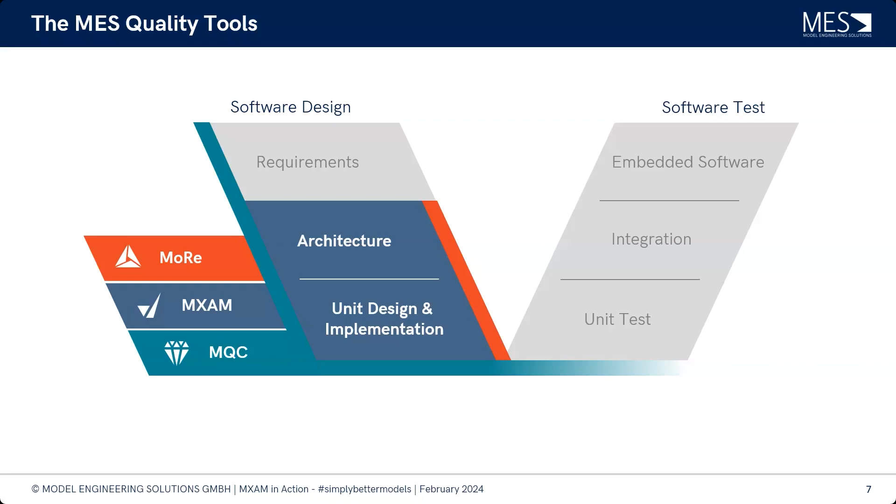But since this is now the webinar on MXAM in action, we will get to see MXAM a little bit more, really focusing on the Simply Better Models part. So this webinar can be split up into 4 different parts, where I would like to take a step back again and motivate the static testing. Then we will see how MXAM is really the guide to better modeling. And then we will see what to do to achieve simply better models. And this is concluded with a live demo.

So let's take the aforementioned step back and see static testing and the MES Model Examiner, where we come back to the V model. We have the different sides of the V model, and we already saw that the MES tools are focusing on the left-hand side of the V model, consisting of the design phases, and on the right-hand side we have the test phases. And the test phases care about the functional quality of the software, the fitness of the functionality. And this tackles the question: have I developed the right thing?

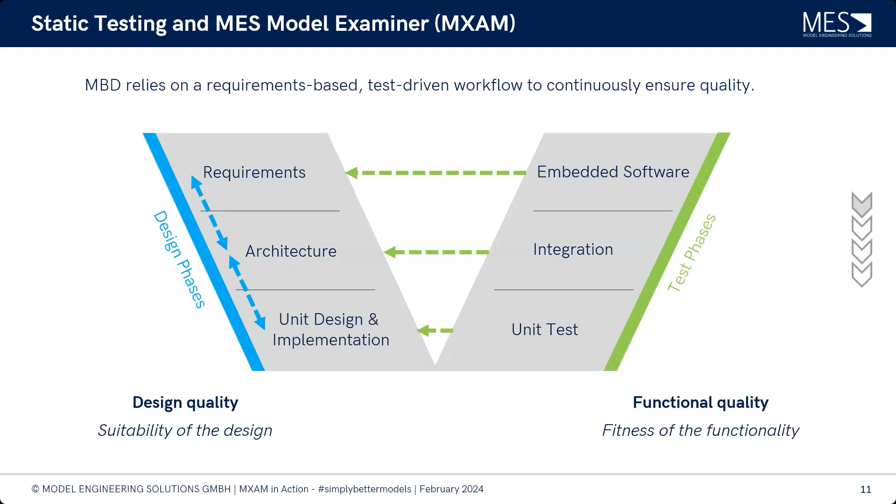And in order to ensure the quality of the design, we can front load the quality assurance here with static testing of models. And with that, we can improve the quality of the model and the developed software even before code is generated.

So that we can really start with quality assurance at the first stages of development. Therefore, the MES Model Examiner, or short MXAM, does the static testing highly automatically, in order to increase readability, robustness, and avoid errors, because it can cost you much when you detect errors late in the development process.

As I mentioned, we can assure the design quality even before we generate code. This means, with good design quality of a model, you also improve the generated code. So let's see how this is done in detail, with a small picture example.

So this is a very small subsystem here, but when we assign to review it, we may stumble upon different things that are not good design quality. For instance, when we tackle the question, okay, how is the interface? So let's have a look at this.

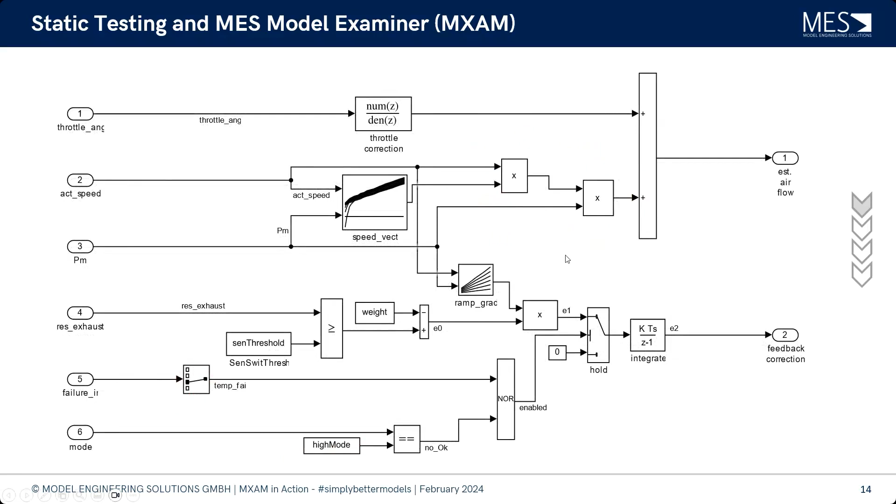And how does the MES Model Examiner do this content-wise? So the users of MXAM know this. In order to evaluate design quality in the last decades, it was established that we have modeling guidelines coming from different standards, like MISRA and the MathWorks Advisory Board. We at MES, as experts in functional safety, have also published our own modeling guidelines document.

This tackles several topics, like we saw -- model layout, data and control flow, data typing, which influences the generated code, and also configurations in and around the model, as well as configurations for the automatic code generation.

On the other hand, MXAM also assesses the application of design principles via different model metrics, which are derived from standards. For example, the functional safety standard ISO 26262 has several design principles for software architectural design recommendations. In order to assess if we follow these recommended design principles, we can use metrics, which map certain numbers to specific model parts, in order to see how well we executed these design principles.

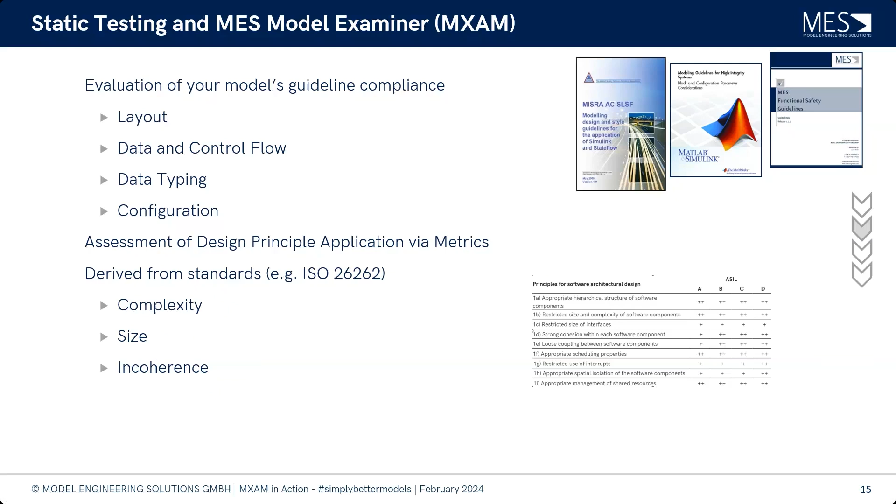So now that we know what is analyzed, let's have a look at a typical agile working day when developing the model. We want to ensure the suitability of the design quality, so we'd like to analyze our model in respect of design quality and have a report that shows us what the quality is. We'd also wish for guidance and hints on what to do now to improve our model and the design quality, in order to achieve better models.

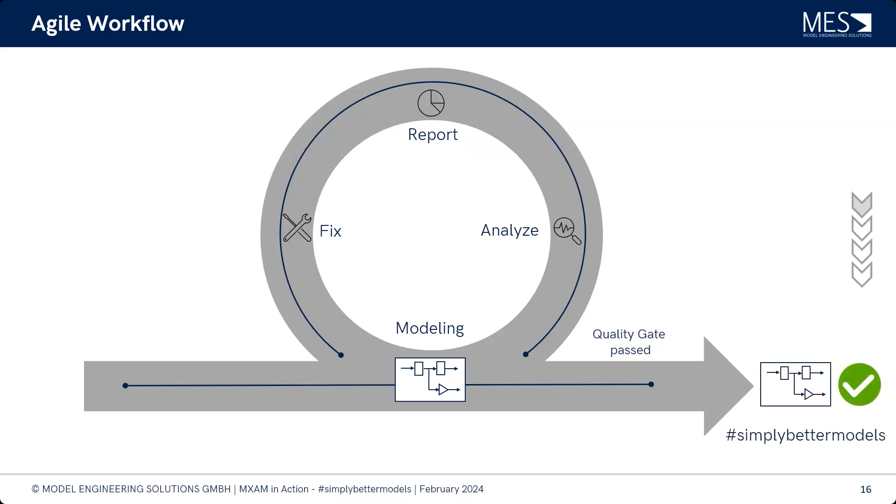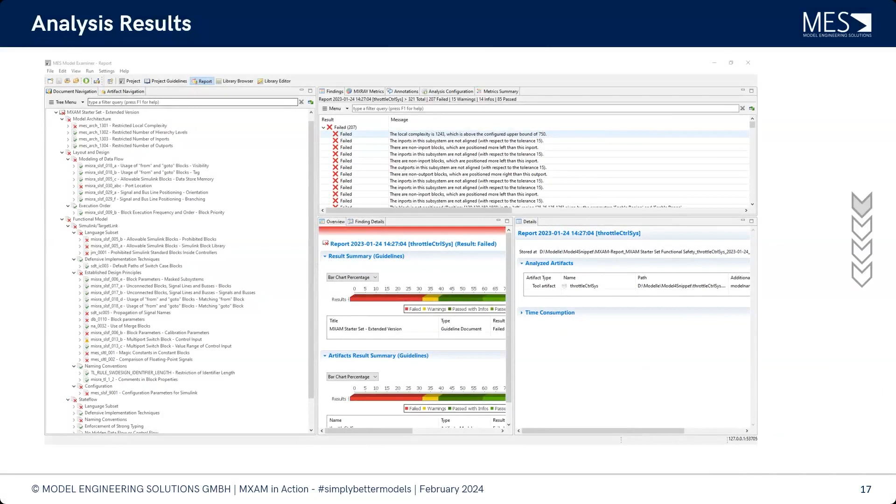So once we have such a report and know what is really analyzed automatically, the question now is: where to take action?

And this is now the point where MXAM becomes really your guide to better modeling. So we want to have a look at the different sections of an analysis report of MXAM.

At first we have, and we will see this again later in the live demo, the document navigation, where we can start from the point of view of the guideline document to see our design quality there and where we want to improve.

But you can as well take this from what we call the artifact navigation, really from the point of view of the model hierarchy, where we have enabled the number of findings so that we can directly see a certain subsystem that may need the most attention.

So for instance, we see here the subsystem 'airflow calculation' at first glance seems to have the most findings.

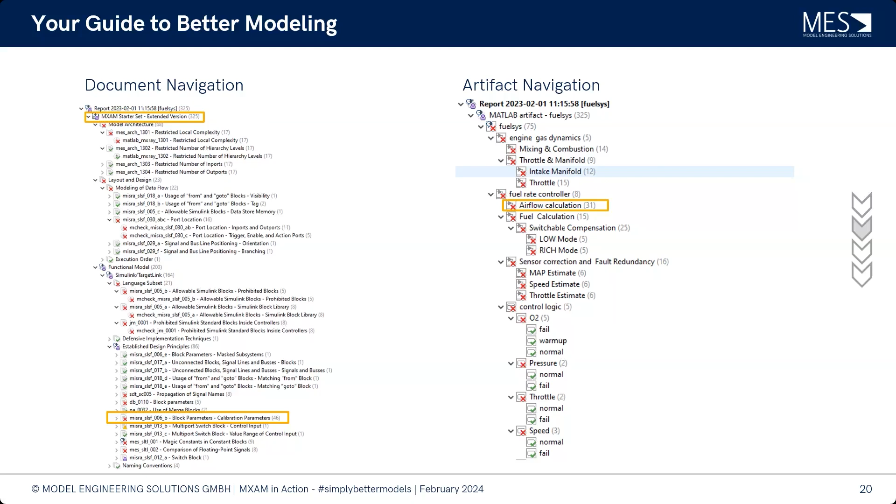So in the document navigation, we have the document and can tackle the different findings per guideline and guideline chapter. On the other hand, when we want to tackle it from the point of view of the model hierarchy, we can use the artifact navigation.

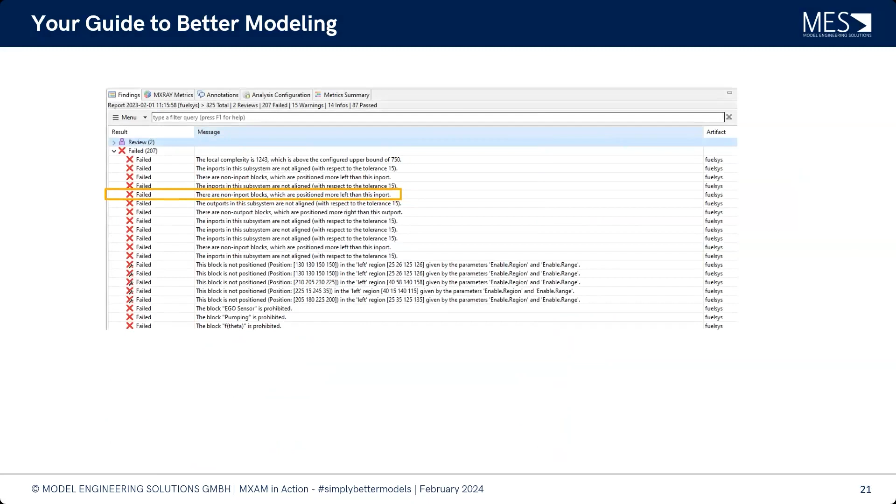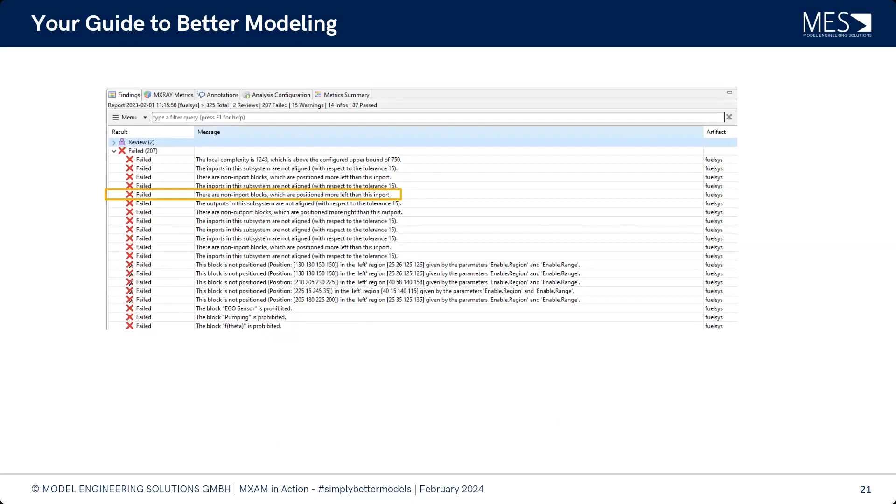Then, per this navigation, we can have all the findings listed. For instance, when we want to see which findings are in the airflow calculation, we get this in a table list. From the table list, we can drill down further to the details of these findings, where it explicitly states what the guideline violation is, with direct links into the model.

So with MXAM, you always have a direct connection to MATLAB Simulink, and from there you can directly look at the affected part in the model.

This is not only a guide to where to take action, but also good guidance on what to do now. Directly from the report, you can look at the documentation of the guideline and the check, and see that for each check there is a proposed solution as well as a repair action which can be carried out.

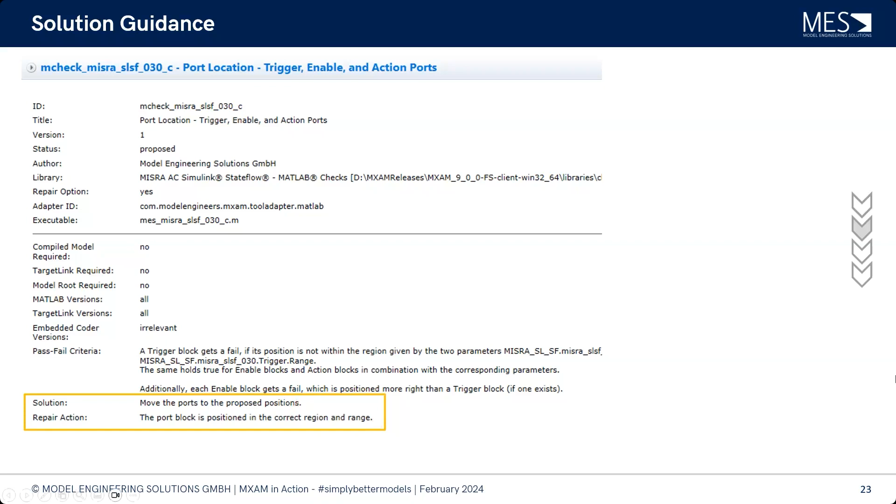So this leads us, after we have answered the question of where to take action to increase the design quality of my model, to the next question: how to take the action, in order to achieve simply better models.

So here we get back to these examples. We have two solutions which are pretty straightforward. One concerns having consistent signal naming throughout the model, to increase readability and to have a good mapping from model to generated code.

It's clear that we want consistent naming, and one thing that supports this is to set the Simulink property 'show propagated signals' to on. Also, when it comes to switch blocks or other blocks, there's an option to require all inputs to have the same data type, again in order to avoid unexpected behavior, for instance.

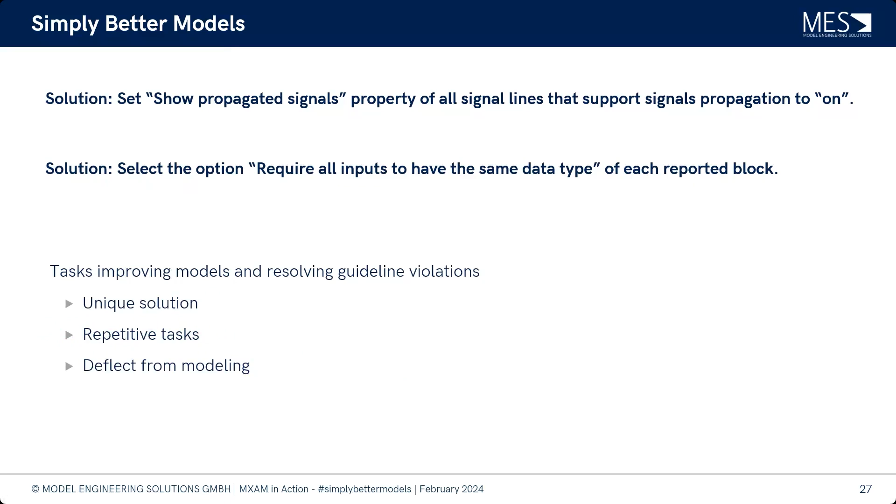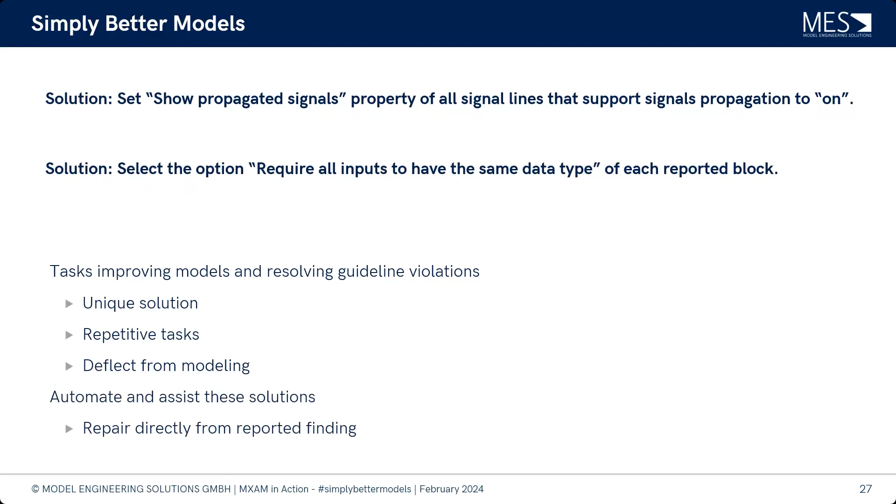So one thing we can wish for is to automate and assist this solution, and for that we can use the MES Model Examiner to directly repair the finding from the report. This is something we will also see later in the live demo.

So here, for instance, you see there are empty signal lines - this example shows signal propagation is not switched on. To support the modeler so they don't have to go to each signal line and switch it on manually, you can just do the repair action, and we see the signal name is now propagated. This repair action can also be done for the whole model, so that the entire model then follows this guideline.

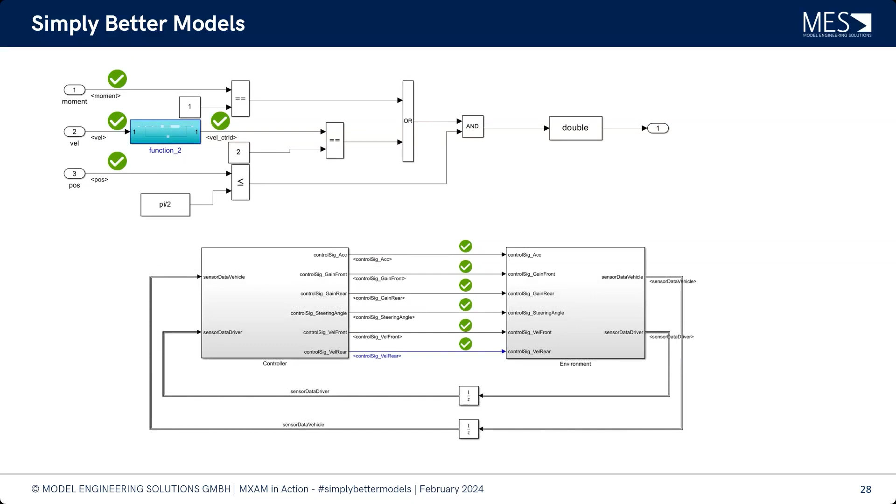So now it also may happen that there is a guideline violation that doesn't have an easy or unique solution. And we also talked about these model metrics, in regards of when we want to achieve a strong cohesion between components or to lower the complexity. So these are more complex tasks.

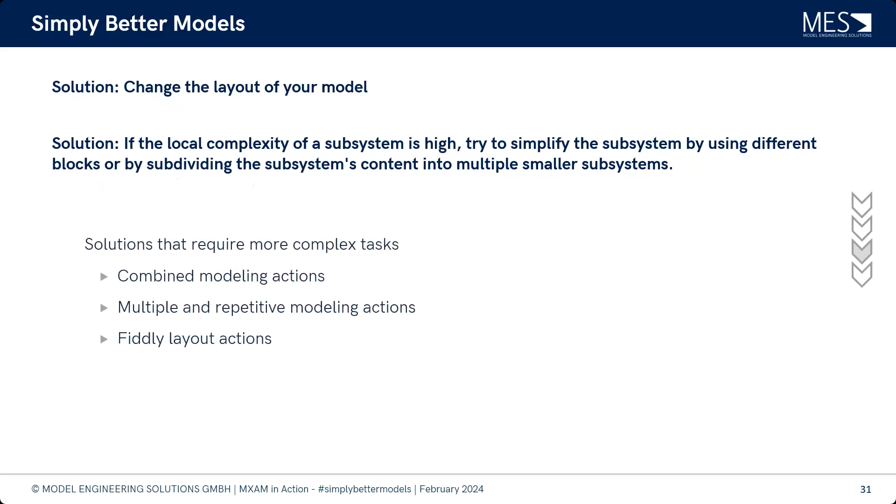So I have two examples here. One is when it comes to layouting guidelines, when you just change the layout of your model in order to achieve a signal flow from left to right, for instance. And as well when it comes to complexity, if it is too high, try to simplify it using different blocks, subdividing a subsystem into smaller subsystems.

So things or solutions that require more complex tasks consisting of combined modeling actions, which may again be multiple and repetitive modeling actions, and may as well, when it comes to layout, involve really hard to tackle, fiddly layout actions. Therefore, for this kind of solution, it would be great to facilitate and automate those actions for layout especially, and as well for refactoring and partitioning of models.

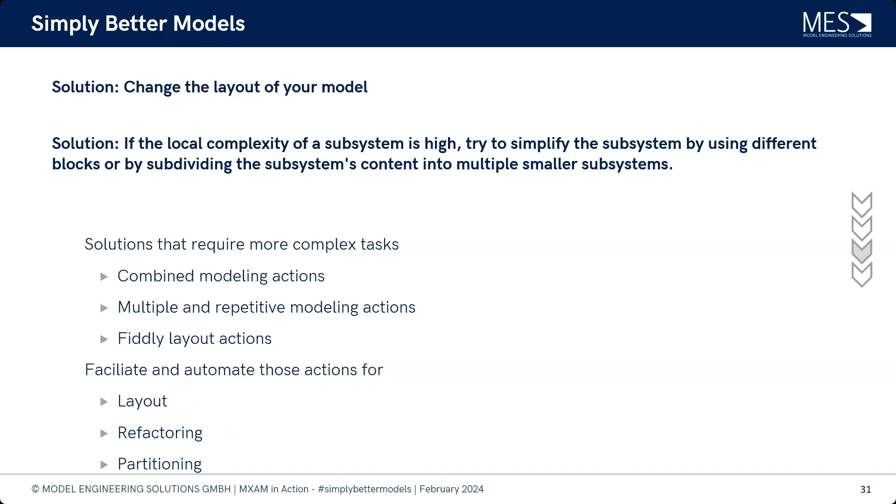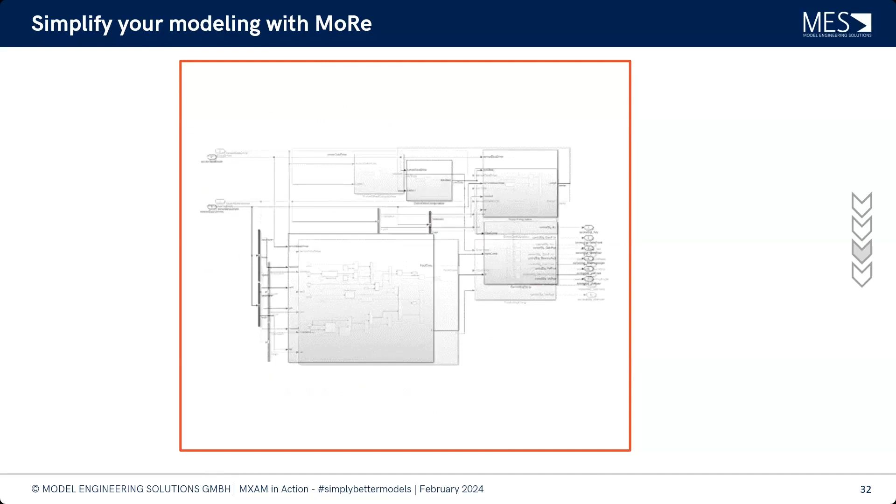Therefore, when you recall, the beginning was the tool MES Model and Refactor, developed in order to support the modeler with these problems. And as you see in this small video, a subsystem is taken and decomposed into several parts, layout is changed. So this is one task you can tackle with MoRe.

And now the good news I can present in this webinar is that, like we had seen in the slides, the MES Model Examiner now integrates MES Model and Refactor, so that MoRe is now installed together with the latest released MXAM 10. The MoRe actions and the tool itself can be directly used with the same license. So we can conclude that there's a synergy between the analysis, reporting and repair capabilities of MXAM, and the MoRe modeling actions, so that the integration of MoRe into MXAM is the best addition on the way to better models.

And there I think we now come to the question, how does this now look in practice? And then we would like to have the live demo here.

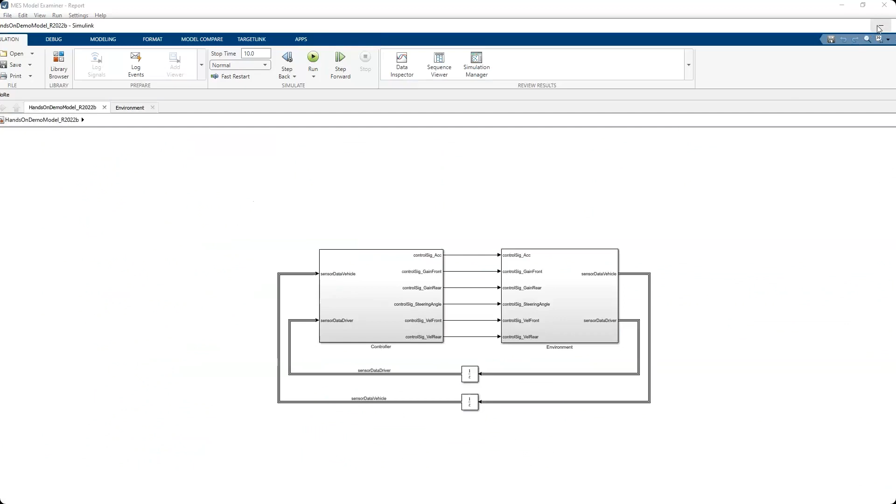So now this is the MXAM 10. I have already run an analysis here on a model which I opened, and we get the report here, where we have on the tabs the document navigation, and as well, as I said, the artifact navigation, where it shows a number of findings that is also already enabled, so that you can really, like shown on the slide, see if there is a subsystem that has the most findings or needs the most attention.

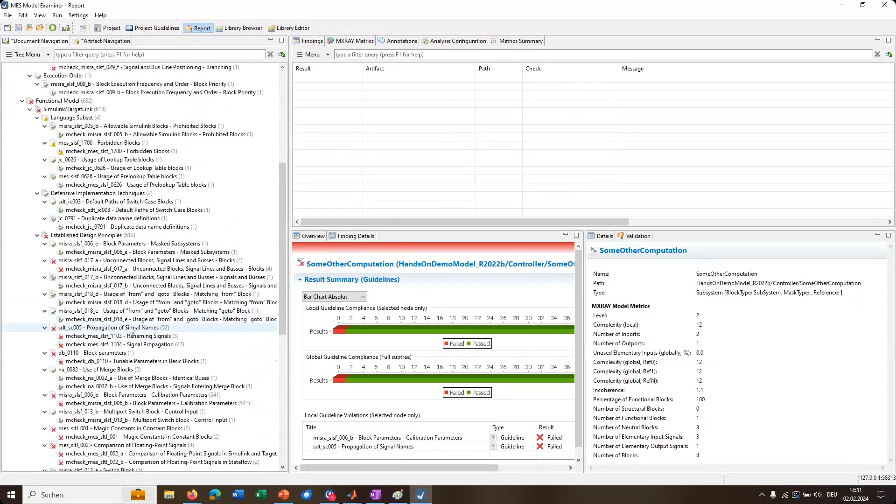And this can also be done for the document navigation, so that you can see if there is maybe a guideline which has one of the most violations. And when we have a look here, we see the aforementioned example, the propagation of signal names. We have 52 findings here.

When you then go on from this document perspective, we see here for this guideline, like we saw, we have listed all the findings in a little bit more detail. And then we can use this table in order to click through the findings and really drill down to the details here, where you have as well the direct link into the model.

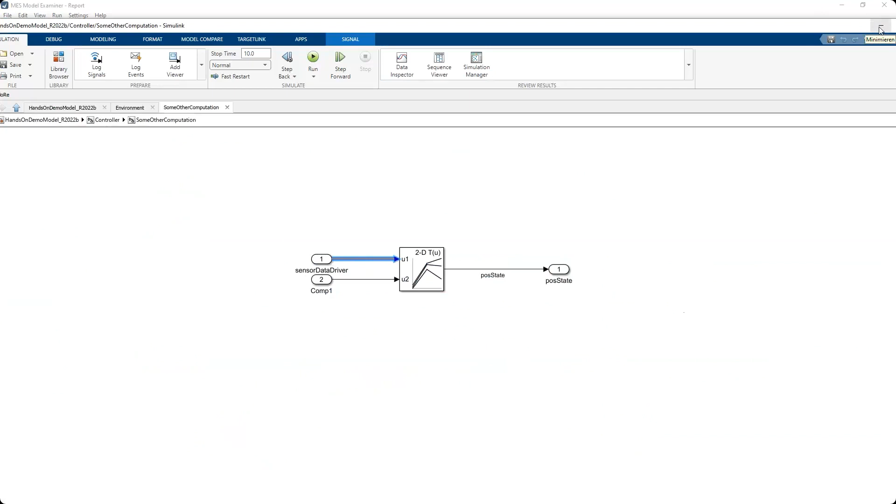So when we just see the link here, we see there's no signal name. So it seems, or it is clear, that the propagation is not enabled there. And then we have as well other failed findings. So, like I said, we want to ensure a consistent naming throughout the model, which also includes that the signal should be named at the source signal.

So for instance, here we have a signal line named, we see here, but it is not the source signal, and we can also directly see this is the source signal where the bus is created. So it is not named there, but in between.

And these links really help you to understand the guideline violations more, here with the link onto the signal line, and as well guides you to the source signal. So now we saw this in the slides, that this is one guideline violation that can be automatically repaired. This you can as well see on this icon here, this little cross with the wrench. You can as well see it here on the repair update, that the repair option here is set to yes.

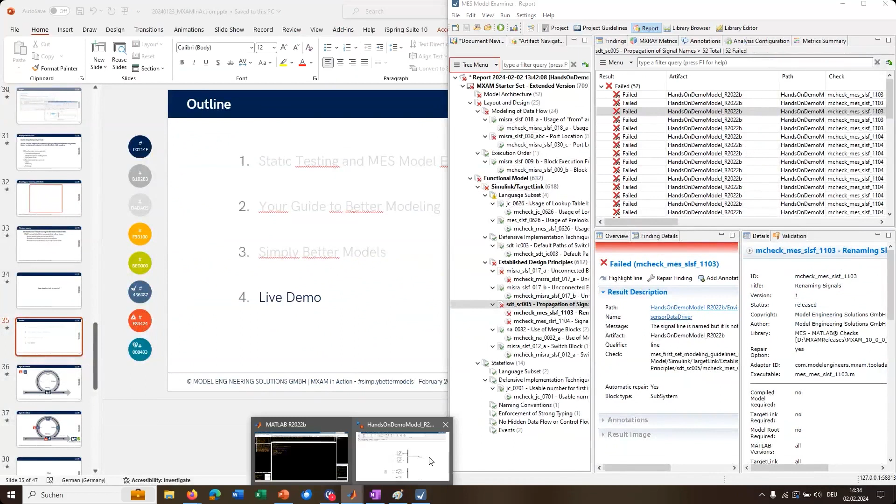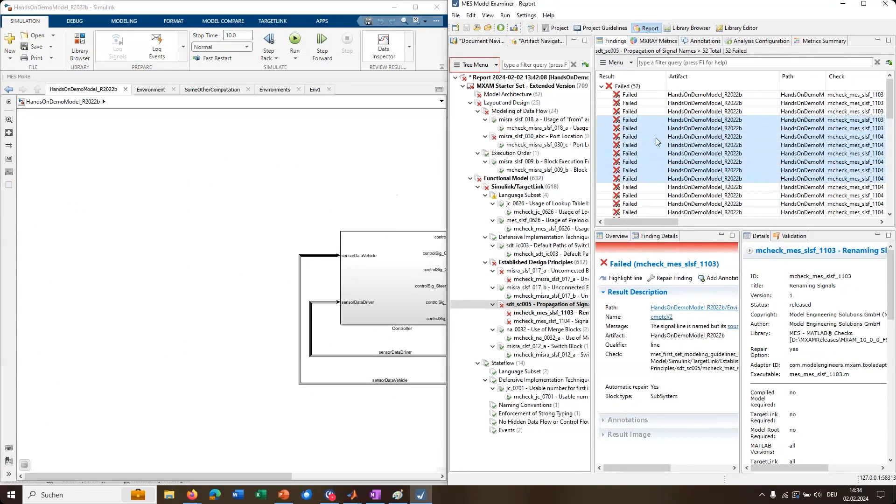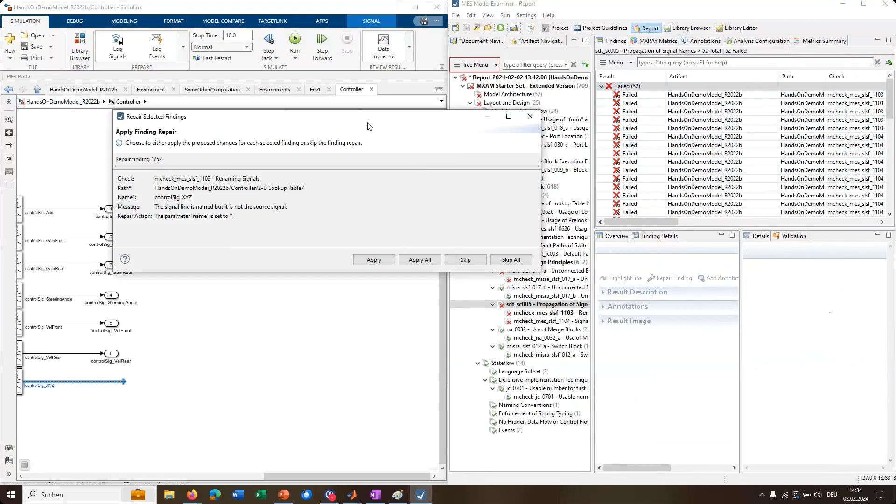But the best way, where you can also set the number of findings, is to show the repairable checks only. And then you can view only these checks that are repairable. And now how to do this. So I would like to make this a little bit with a split screen. Because when we want to repair it now, you can right click here on the finding, but as well do a multi-selection, for instance, or directly in this list here, click on repair findings to see all 52 findings.

And there now you get this dialog, which shows you in a transparent way, again, what is the guideline violation. So we had here, this is named but not the source signal, and what the repair action is doing. So for instance, to get out of this violation, since we want to name it on the source, not allowed to rename it, the name is set to empty.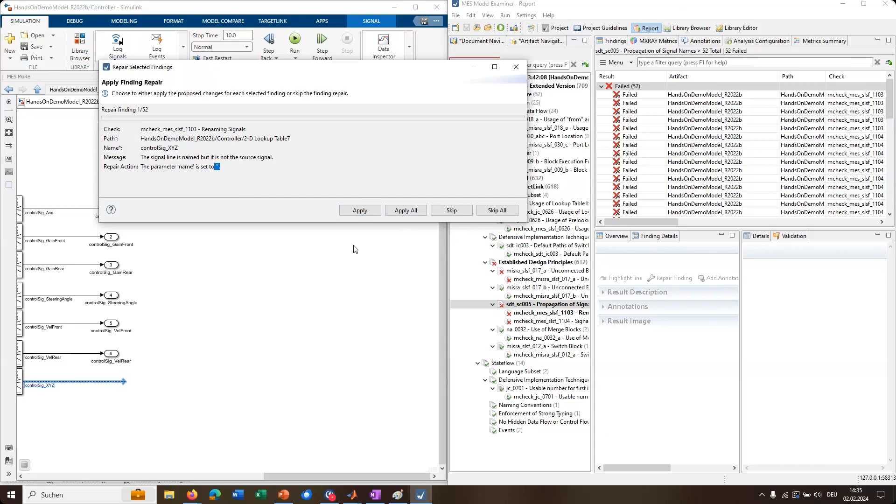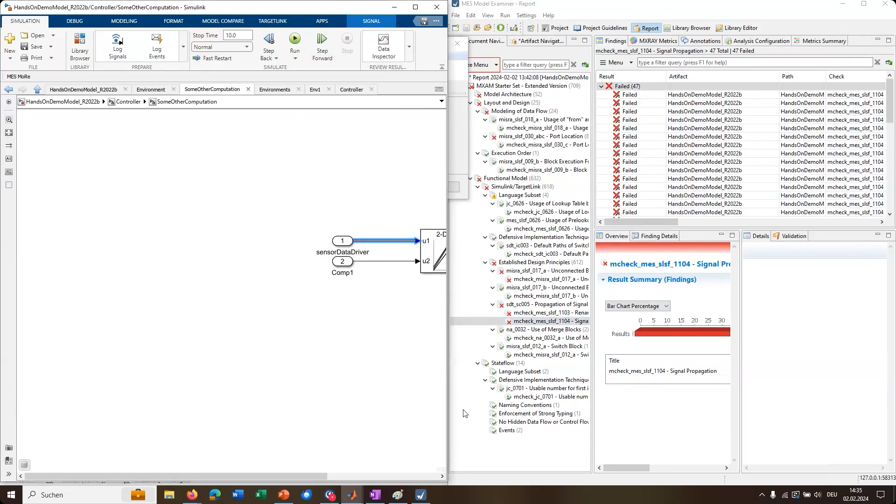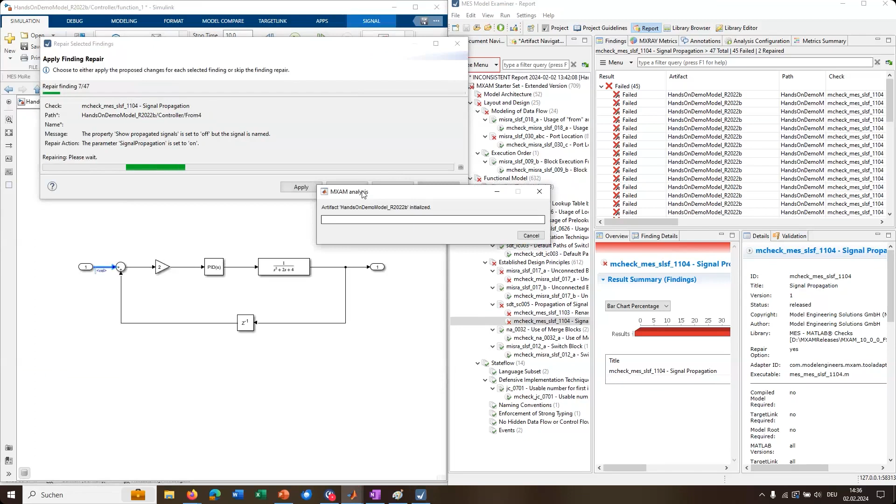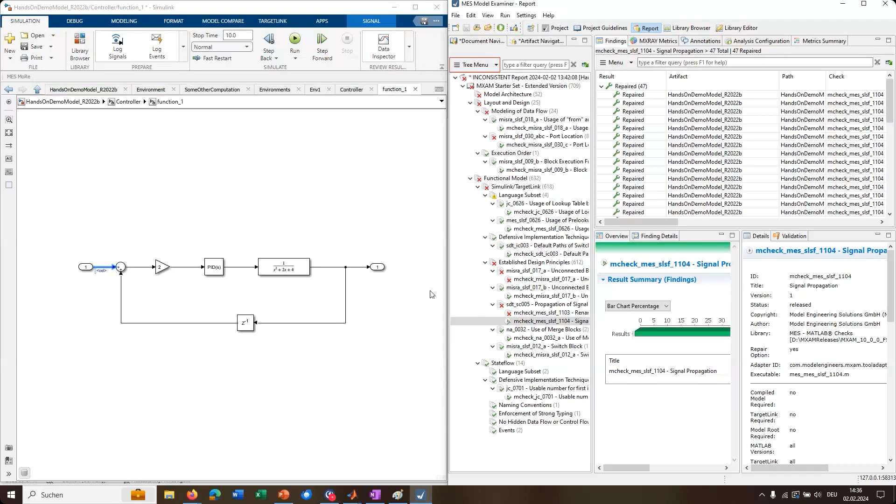But I wanted to start with the signal propagation. So again, we saw this already, and there this was the unique clear solution, to set it to on. And now you have the full controllability here. See, this is set to on. Apply it, see that this is on, and again, go step by step through these repair actions with the highlight into the model. And then, when you say, I have my trust in the repair action here, you can say, okay, apply all, so that it goes through all the findings and applies it.

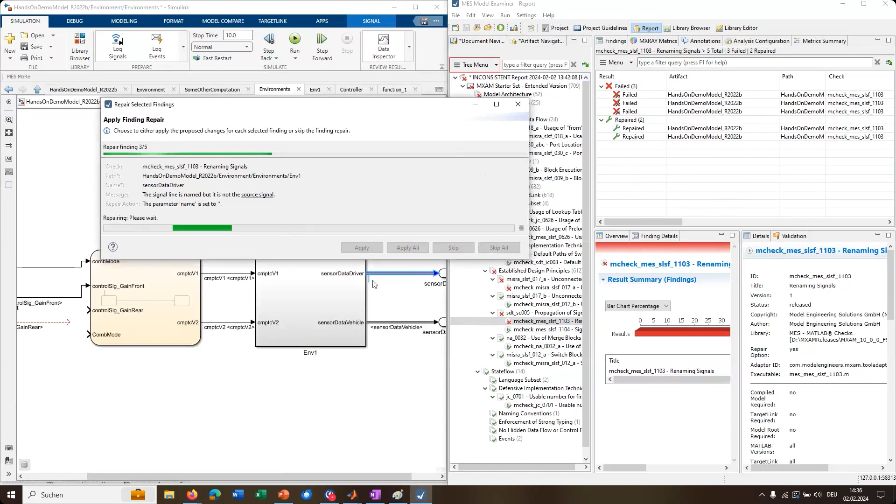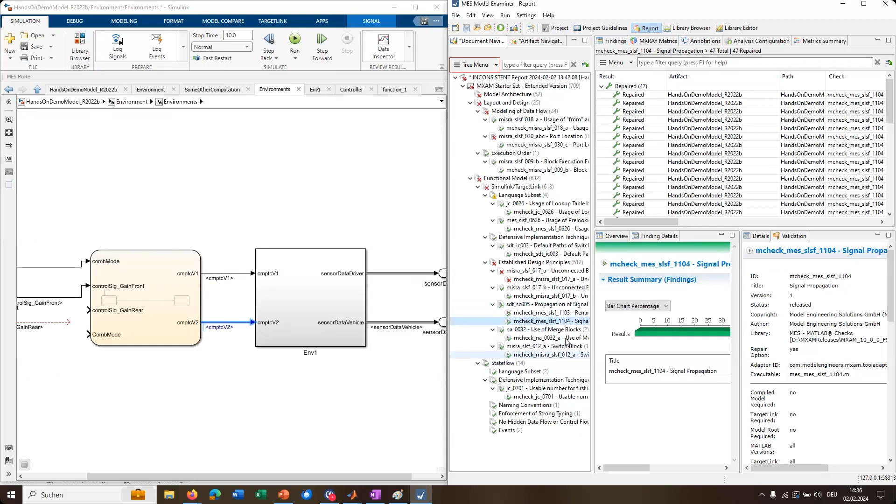And this can as well be done for the other findings we have, where we set the name to empty. So we see that this was named empty, and then we can just say, okay, apply all when we really see that this is doing right, and we see that we have repaired the findings here and here as well. And then you can really prove it by rerunning the checks, or rerun all checks for the guideline, in order to see that we now have a passed guideline, so that we have improved our model in regards to the signal naming consistency.

So this is the one thing we had in the slides to tackle guideline violations with unique solutions, so that the MES Model Examiner helps you with the automatic repair action, in a transparent way, with the links into the model, with good controllability, so that you can really choose how many findings you want to repair, and whether to apply them step by step or all, and as well really see in the model what it is doing in a reliable way.

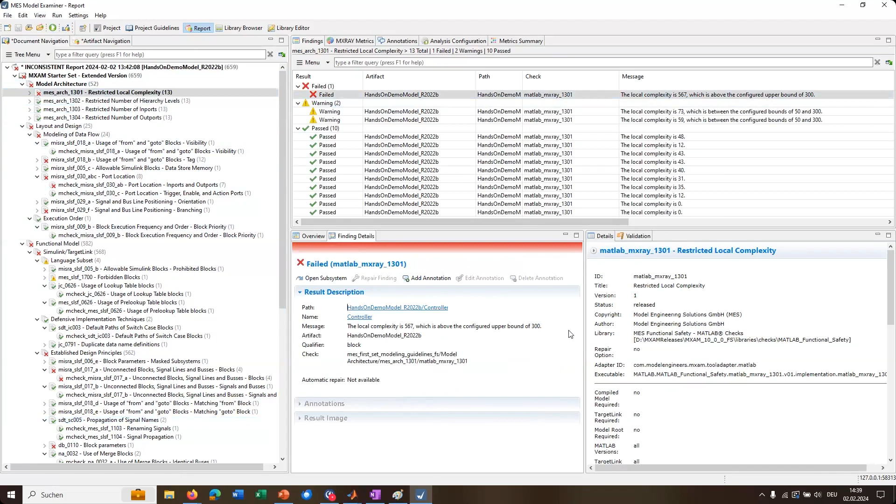But let's move over to the model metrics we talked about in the slides as well. So let's get back to all the findings. We see at the chapter model architecture, there's one failed finding which is about the local complexity, which is higher than a configured boundary. Because with these model metrics, it always depends on your experience how to handle these numbers, and as well how big your models are in your organization. So for this example, we have made this the boundary for the local complexity of subsystems.

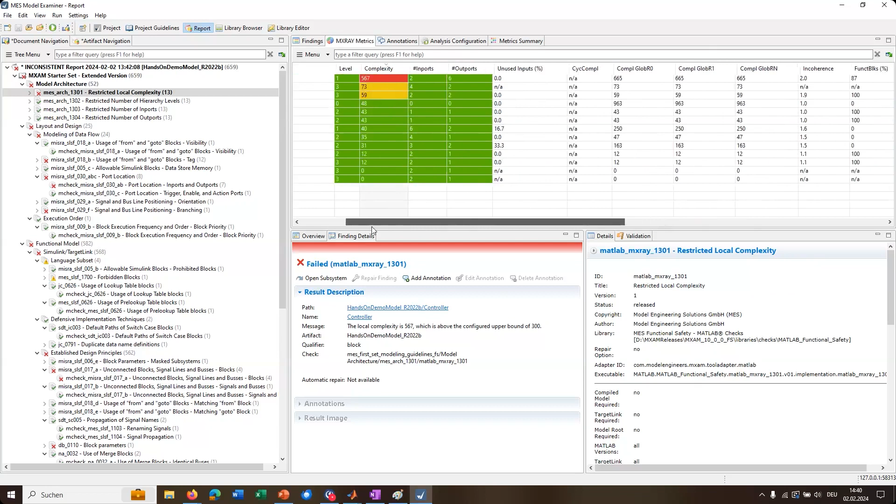These metrics can also be seen here in this table, where again you see the metrics per subsystem. So we see here the complexity. There are some easy metrics like number of outputs and inputs, unused inputs. So the effectiveness of interfaces, really important for testability, for instance. Also the incoherence I talked about. So really different metrics, as well the mixture of functional blocks and structural blocks here. So there are several metrics available in the static testing that assess the application of these design principles from the ISO 26262. But let's now tackle the high complexity, and there again we can see the solution here. We had this already as an example.

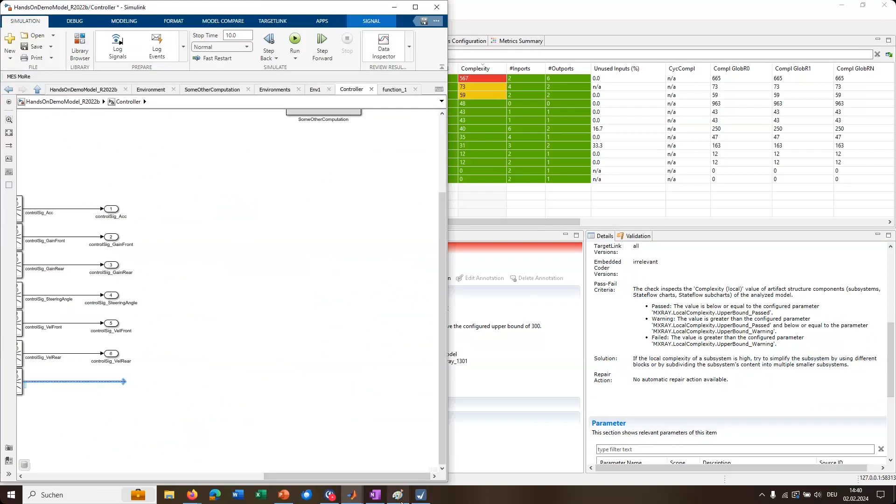They try to simplify by using different blocks as one proposal, or subdividing the content into smaller subsystems. So let's first of all go into the subsystem itself. We may see at first glance that there is a mixture of functional blocks but also structural blocks with the subsystems here. We see that there are several Goto/From blocks, and it seems that there are as well different calculations that can be separated.

And now in order to divide or refactor this, we can use the MES MoRe, which, as I said, is a toolbox for Simulink. This can be accessed here in the tool strip, and as well by right-clicking into the model. And again, the news at the end of the slide was that this is now integrated into MXAM 10. So when you're choosing to work with MXAM 10 or upgrading to MXAM 10, you have this already as a package here, and you see here these different actions.

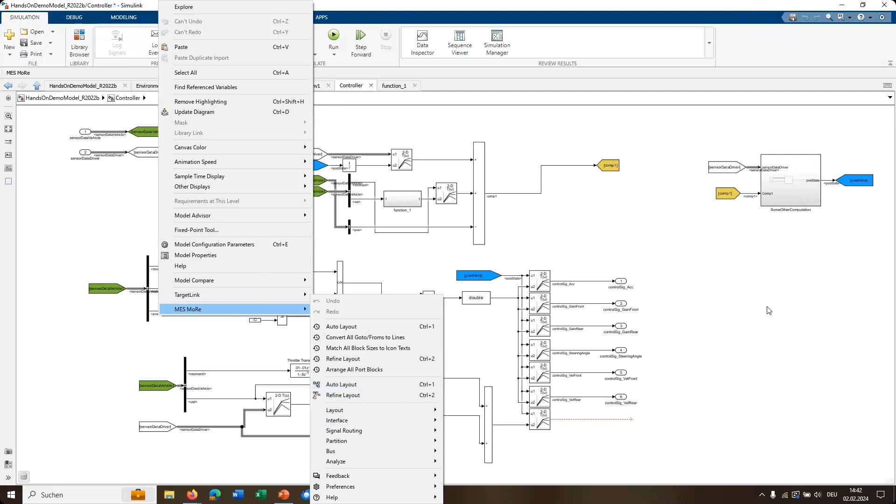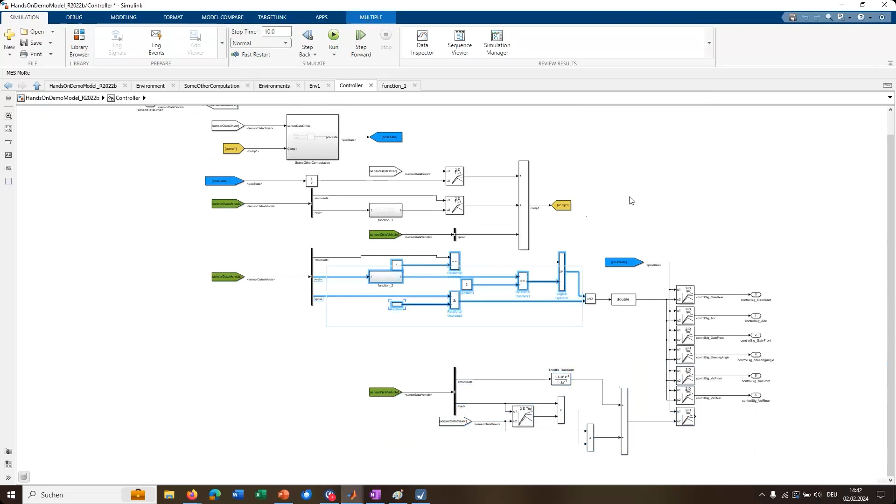We have several layout actions, things for interface, signal routing, and two of the, I would say, big actions are auto and refine layout. In order to get a good overview here, let's start with an auto layout. Okay, so a little bit arranged better, where we can maybe see better that there are several calculations that may be separated or are candidates to put into smaller subsystems.

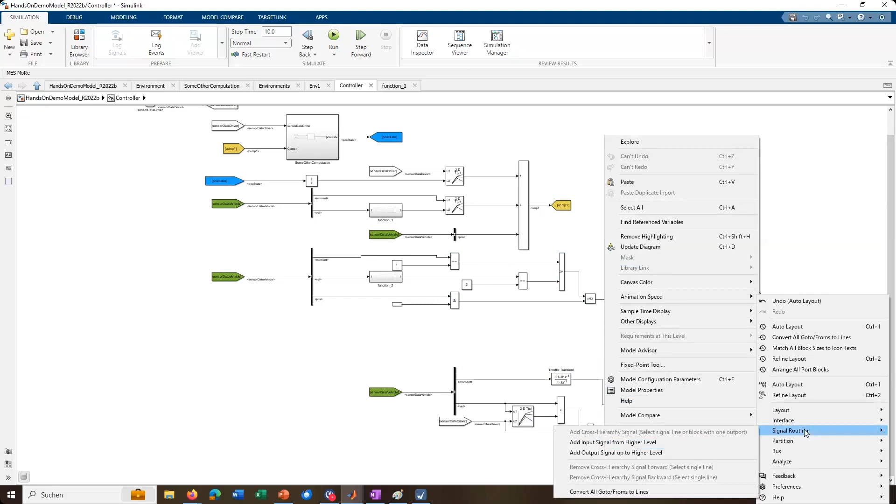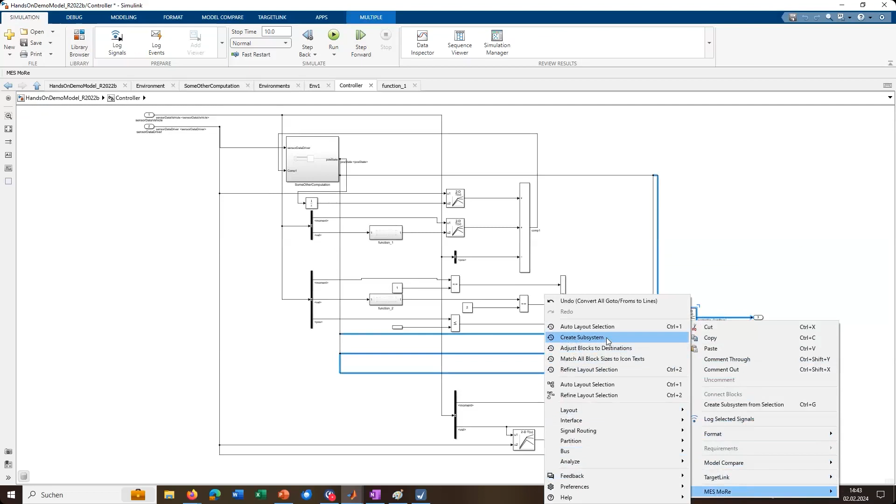One advice was also to use different blocks. And I think in order to increase the readability and maintainability, we can get rid of these Goto/From blocks. Therefore we have the actions for signal routing to convert these to signal lines. So now we reduced as well the number of blocks in general. And I think then we can also already see that these different lookup tables to calculate these different signals we can put in a subsystem, where we have as well an action from MES MoRe.

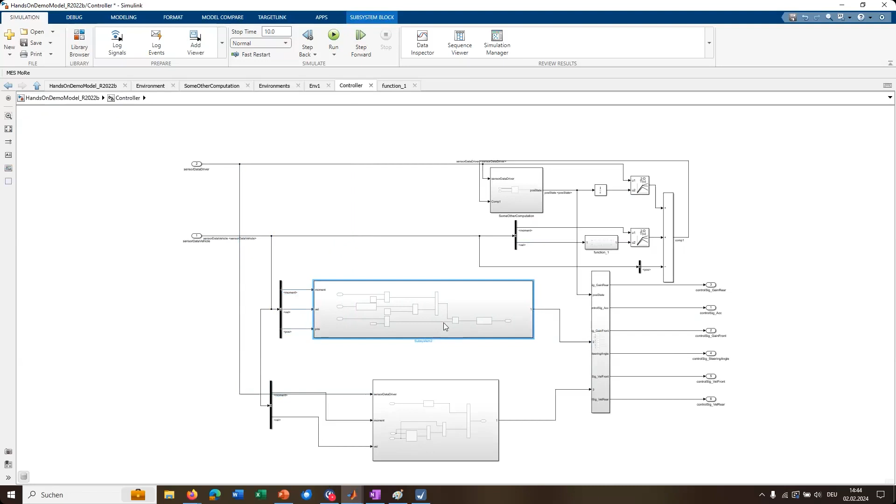And maybe do another auto layout. So I think then we can put this into a subsystem, and as well this above here. The create subsystem action from MoRe is a little bit more sophisticated. The Simulink action is really creating very small subsystems. As you see, it tries to retain the size of the blocks before, and there's also the benefit that the ports are automatically named by the signals that are here, and MoRe is really looking back the signal chains to name them. So this is also in regards of signal consistency.

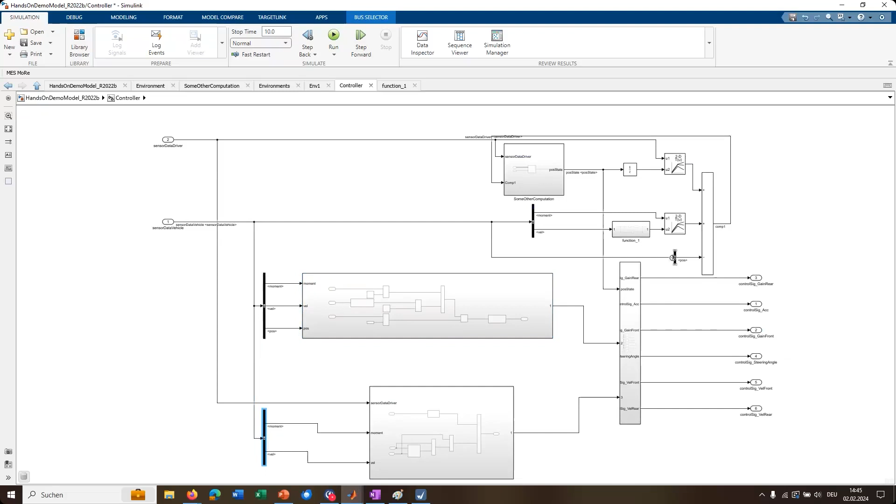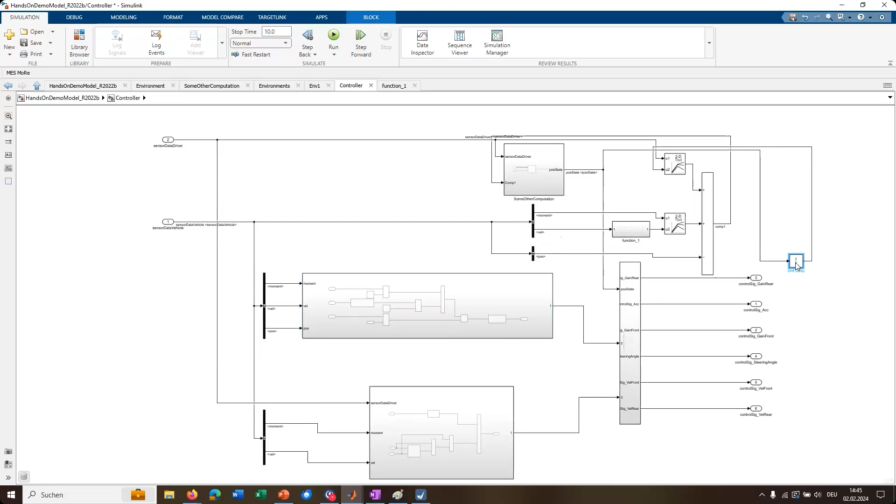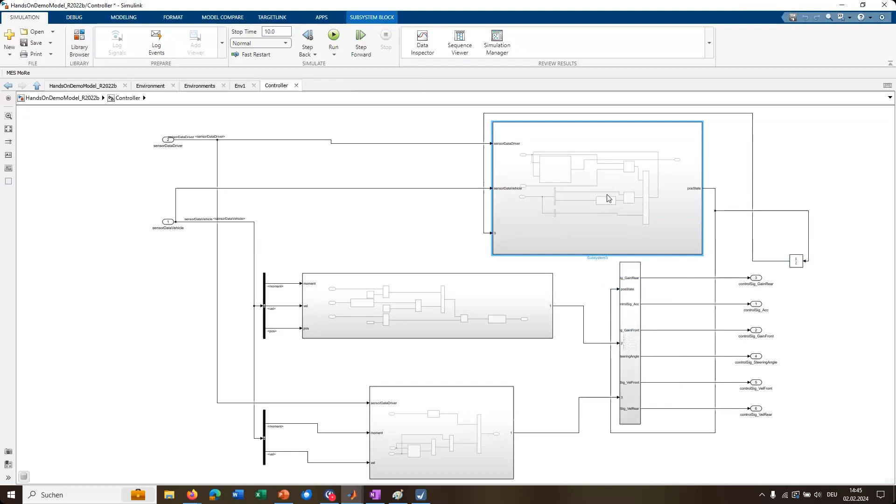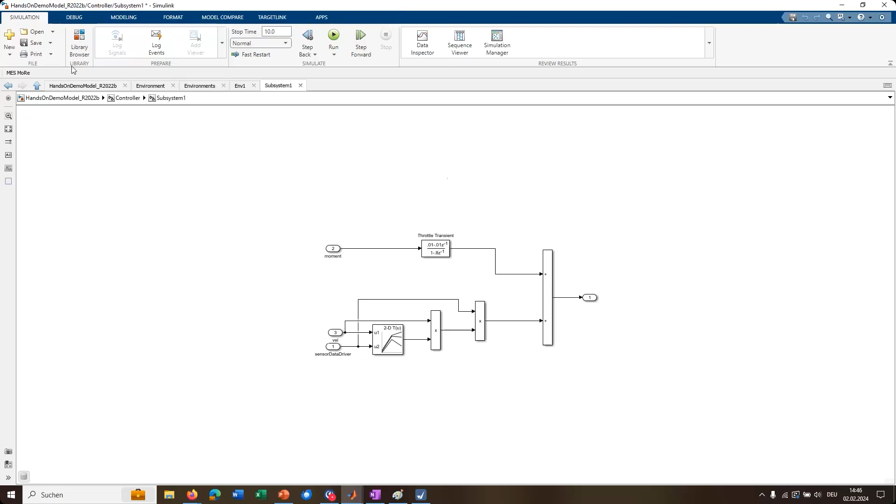And now maybe we want to have this bus selector out of here and take care of the feedback loop, which is a guideline to really have this outside. So let's put the last subsystem here and do as a last polish an auto layout, so that we have now decomposed this complex subsystem into smaller subsystems, which are less complex, so that we have really a low complexity per subsystem, and especially for this case, not again a mixture of structural blocks and functional blocks.

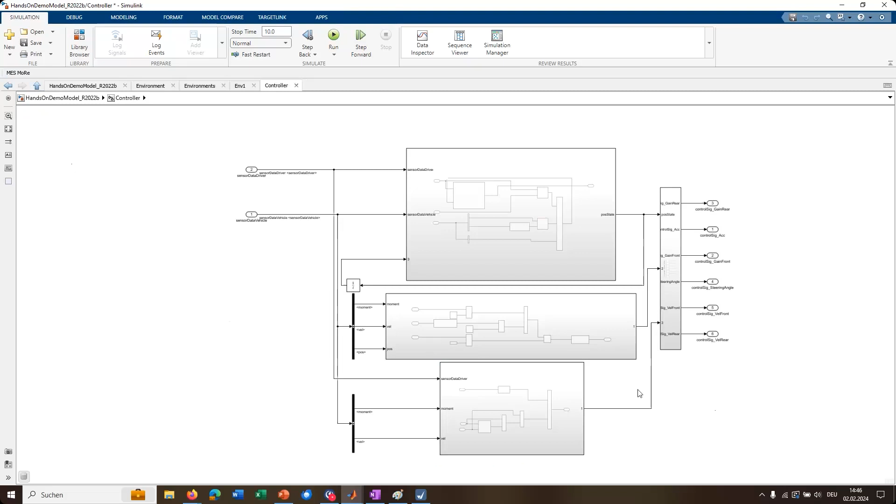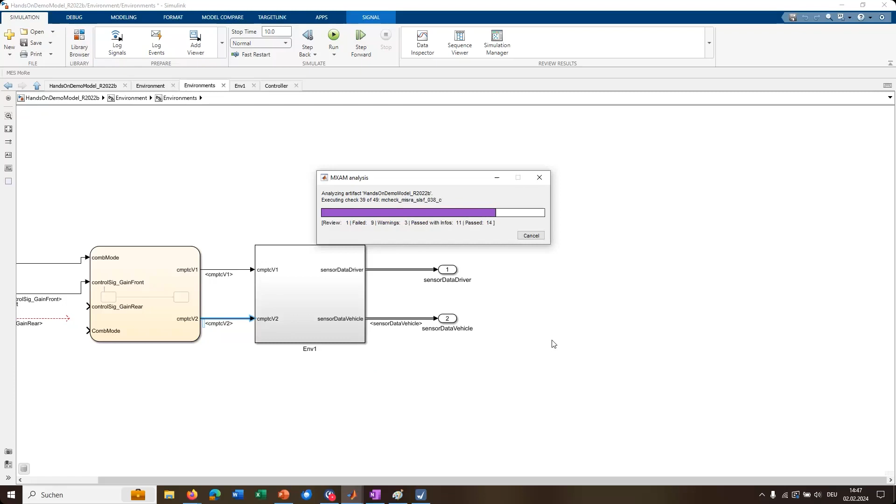And afterwards, when we tackle this complexity with these refactoring options, we can go back and do a reanalysis of the model in order to see if we decreased the complexity there. Yeah, this looks good. Maybe we forgot to name the new subsystems properly. So we have now decreased it under the boundary of 100, and we are under the boundary of 300, where we decided that these are too complex. So really, in order to increase the maintainability as well as the modularity and the readability of these subsystems.

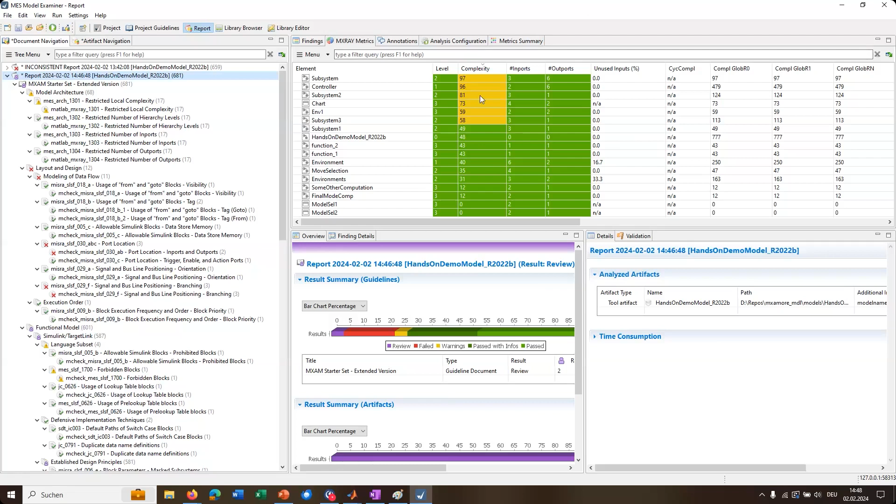We had a look at the reports in order to see how good the design quality of the model is, and with our guide to better modeling we saw how we have hints where to take action, and then hints on what action to take in order to fix things, resolve guideline violations, and improve the model in general.

And this we have done with the help of both of the tools from our focal point Simply Better Models here at MES, so that we have the analysis, the report, and as well the automatic repair function as part of the MES Model Examiner. We saw with the one example that, to lower the complexity of subsystems in order to improve them in regards of maintainability, modularity, readability, we can use the layout and modeling actions from MES MoRe.

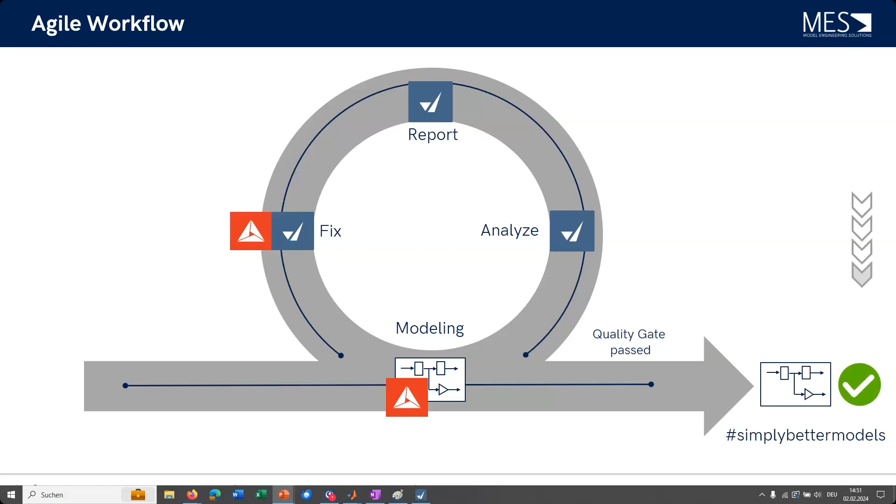I'm back with some questions you asked. So there's one question about M code: is M code in the model analyzed both in charts and in MATLAB function blocks? Very good question. So first of all, we're focusing on analyzing the model. So the code in MATLAB function blocks is not analyzed.

But when it comes to Stateflow, there is the code of state actions and transitions and so on. So this is analyzed as well, but not really the M code of MATLAB function blocks. So this is split up. So to your question, in charts the code is analyzed as well, and in MATLAB function blocks not.

Then there's also a question about the automatic repair function when analyzing the model in batch. Very interesting question, in order to not only automate the analysis, but as well the repair function. So what I can say, there is a call to repair all repairable guideline violations from the last report.